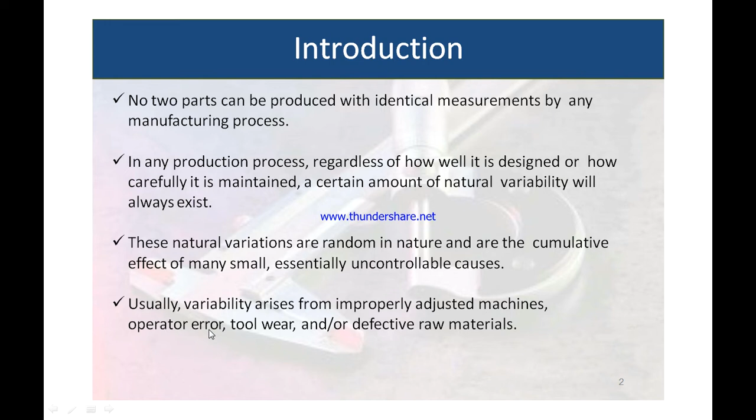Due to this variability, we have to go for tolerances. Such variability is generally large when compared to natural variability. The chances of natural variability are less than the variability due to parameters like machine problems, operator problems, tool wear, or raw material.

Characteristic variation can be attributed to assignable causes that can easily be identified and controlled. If the process can be kept under control - that is, all the assignable and controllable causes of variation have been eliminated or controlled - then the size variation will be within the prescribed limit.

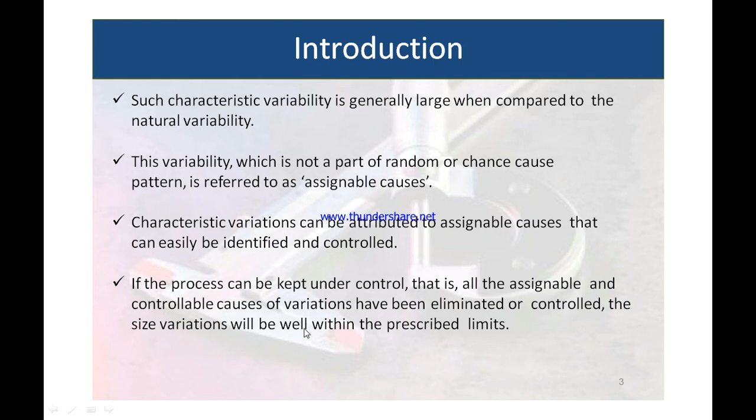So to maintain the size, we must control all the chance causes and assignable causes of variation. Some variability in dimension within a certain limit must be tolerated during manufacture, however precise the process may be.

So some variability must already be tolerated during manufacture. The permissible level of tolerance depends upon the functional requirements, which cannot be compromised.

Suppose we have to manufacture any product for some specific function. The permissible level of tolerance depends upon this specific function's requirement. So that function requires a specific tolerance which cannot be avoided.

No component can be manufactured precisely to a given dimension. It can be made to lie between two limits - upper limit and lower limit, that is maximum and minimum limit. The designer has to suggest the tolerance limits which are acceptable for each dimension used

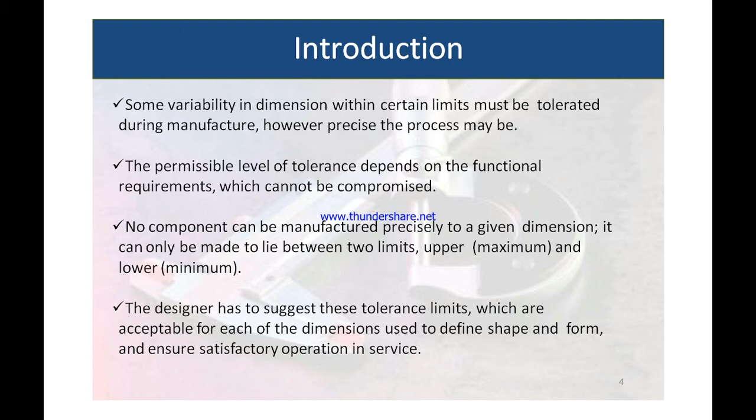to define the shape and form and ensure satisfactory operation in service. So we must give some freedom to the designer to design a component which must be assembled. For this assembly purpose, we must allow tolerance to the parts.

When the tolerance allowed is sufficiently greater than the process variation, then no difficulty arises. The difference between the upper limit and lower limit is termed as

permissive tolerance. For example, suppose we have to manufacture a shaft having diameter of 40 plus or minus 0.02 mm. This is generally a bilateral tolerance.

This means that the shaft which has basic size 40 is accepted, 40.01 and 40.02 is also accepted, and the size of 39.99 and 39.98 is also accepted, because this diameter lies between the two limits of sizes, that is upper limit and lower limit. So permissive tolerance equals 40.02 minus 39.98, which is 0.04 mm, the permissible variation.

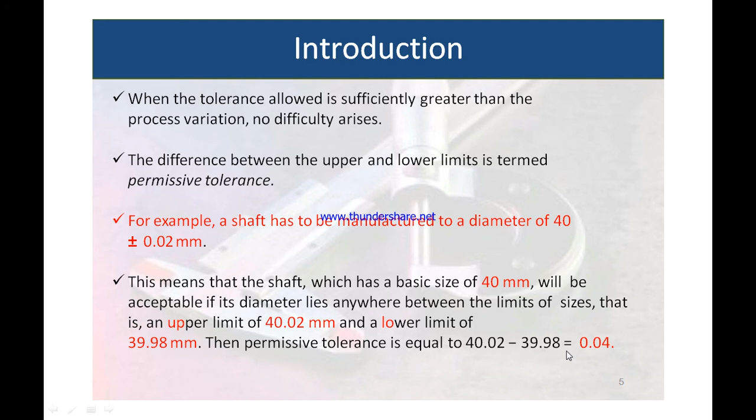So what is the tolerance? The tolerance can be defined as the magnitude of permissible variation of a dimension or other measured value from the specified value. It can also be defined as the total variation permitted in the size of a dimension, and it

is the algebraic difference between the upper and lower acceptable dimension. It is an absolute value. So permissible variation in the size is called tolerance.

The basic purpose of providing tolerance is to permit dimensional variations in the manufacturing of the component, adhering to the performance criteria as established by the specification and design.

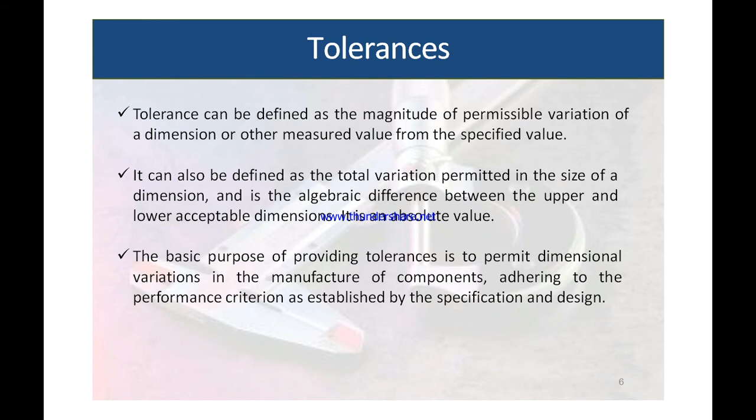Generally, this tolerance is given for the manufactured component to accept variation. So if high performance is the sole criteria, then functional requirements dictate the specification of the tolerance

limits. Otherwise, the choice of setting tolerance to a limited extent may be influenced and determined by factors such as methods of tooling and available manufacturing equipment. The industry follows certain approved accuracy standards such as ANSI and ASME.

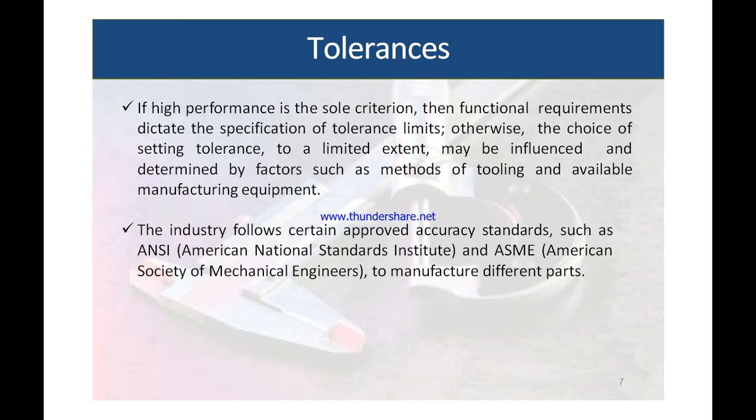So importance of tolerance - why is tolerance given? Tolerance can reduce the cost. How? By reducing the scrap and rework, it can reduce the cost. Once we give tolerance to any part, there is less chance of rejection, because the operator gets permissible variations to manufacture the part between two limits. So there is less chance of rejection due to the tolerance. Hence it can reduce the cost.

It improves the accuracy. When we give tolerance to any part, we have to manufacture as per the assembly point of view. So when we manufacture a part with respect to tolerance, there is a chance the parts assemble together very well in case of assembly. So it improves the accuracy also.

It implements discipline and quality consciousness in workers' minds - another important point in case of tolerance. When we give tolerance to the part, the operator always keeps in mind that he must produce the part within the limits. So he must be disciplined throughout the manufacturing process to meet the required tolerance. This improves discipline in the worker. It also improves quality consciousness, since whenever we give close tolerance, the worker knows the importance of this particular quality, so quality consciousness in the worker's mind improves.

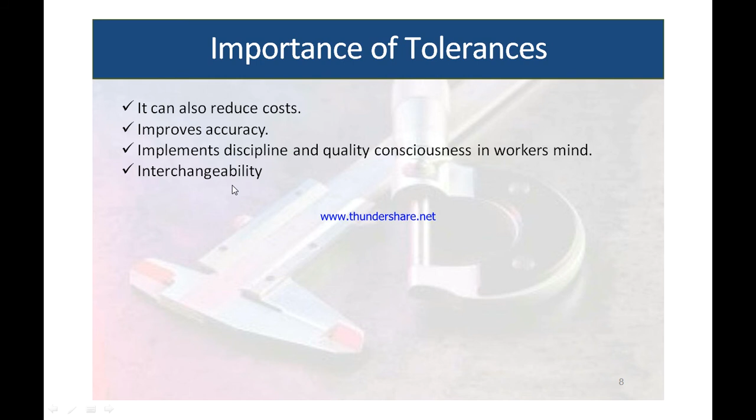Next is the relation between manufacturing cost and work tolerance. It is very important to relate the production of components within the specified tolerance zone to its associated manufacturing cost. Manufacturing cost is inversely proportional to the work tolerance. As permissible tolerance goes on decreasing, the manufacturing cost incurred to achieve it goes on increasing.

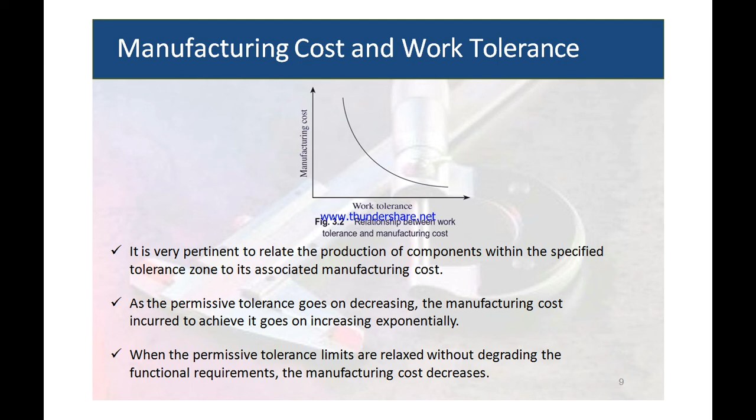Look at this tolerance zone: suppose this is 0, 0.1, 0.2, 0.3, 0.4, 0.5. The tolerance goes on increasing on this side and manufacturing cost on this side. For 0.1 mm tolerance, you bear the highest cost. At this 0.2 mm variation tolerance zone, we have a lower cost. For 0.5 mm, we have the lowest cost. When the permissible tolerance limits are relaxed without degrading the functional requirement, the manufacturing cost decreases.

Next point is types of tolerances. There are different types of tolerances which can generally be classified into the following categories: number one unilateral tolerance, number two bilateral tolerance, number three compound tolerance, and number four geometric tolerance. We can see one by one.

Number one, unilateral tolerance - it is the tolerance where the tolerance distribution is only on one side of the basic size. In other words, the tolerable limits totally lie on one side of the basic size, either above or below it. What we call a unilateral tolerance. Suppose this is 40 plus 0.02 and plus 0.01 - all the tolerances are on the same side. So this is the unilateral tolerance.

40 minus 0.0 and plus 0.02 - here the upper limit is 40.02 and the lower limit equals the basic size. Though this sign is minus, the basic size will not change; it changes only on one side. So this is a unilateral tolerance.

40 minus 0.01 and minus 0.02 - the tolerance totally lies on the negative side, so it is only on one side - this is unilateral tolerance. This is 40 plus 0.00 and minus 0.02 - here the tolerance lies only on the negative side; though it shows positive, it is 0, so tolerance is only on one side. So this is a unilateral tolerance.

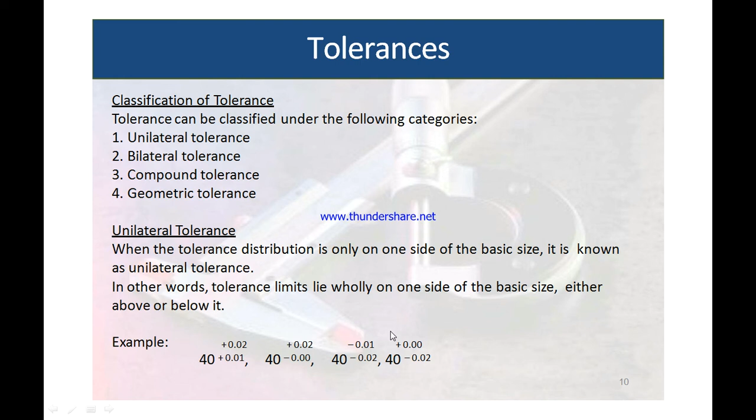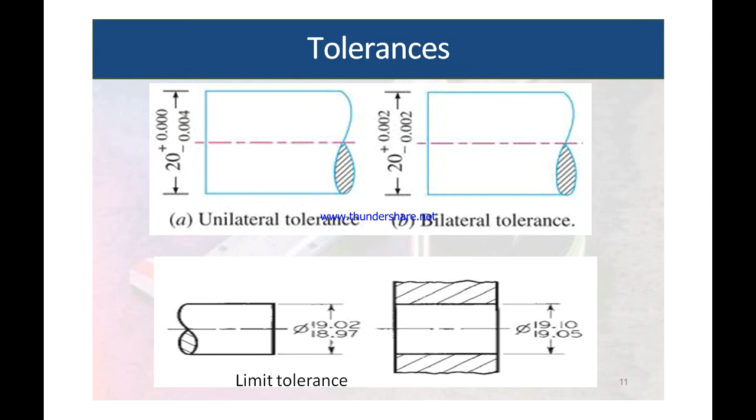Next is bilateral tolerance. When the tolerance distribution lies on either side of the basic size, it is known as bilateral tolerance. In other words, the dimension of the part is allowed to vary on both sides. Example: 40 plus or minus 0.02. So upper limit is 40.02 and lower limit is 39.98. Variation is on both sides, so this is bilateral tolerance.

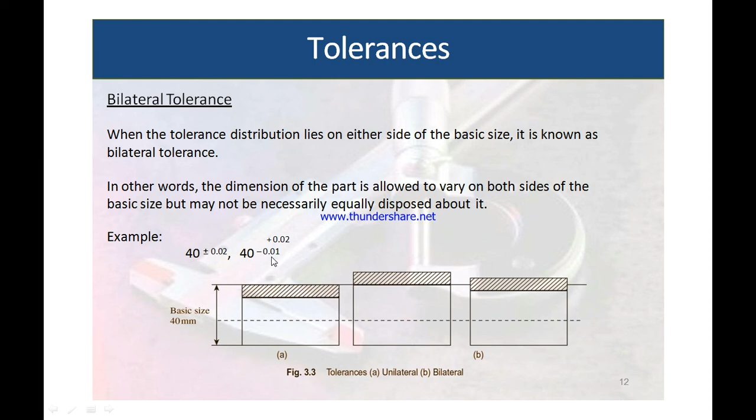In this case, 40 plus 0.02 minus 0.01, the variation is on both sides, upper limit and lower limit both are variable. So tolerance is given on both sides. This is also a bilateral tolerance.

In practice, compound tolerance should be avoided as far as possible.

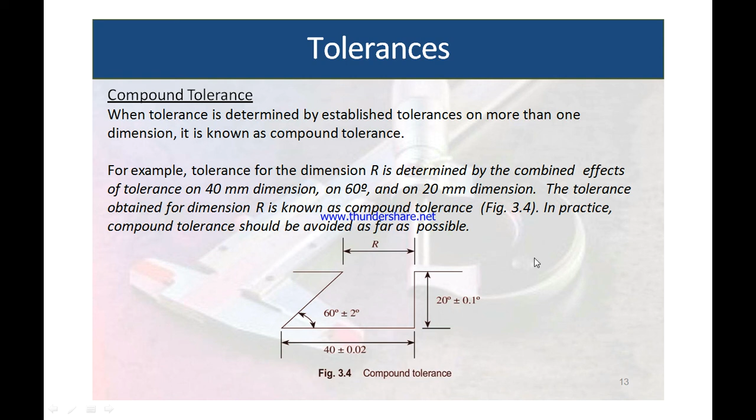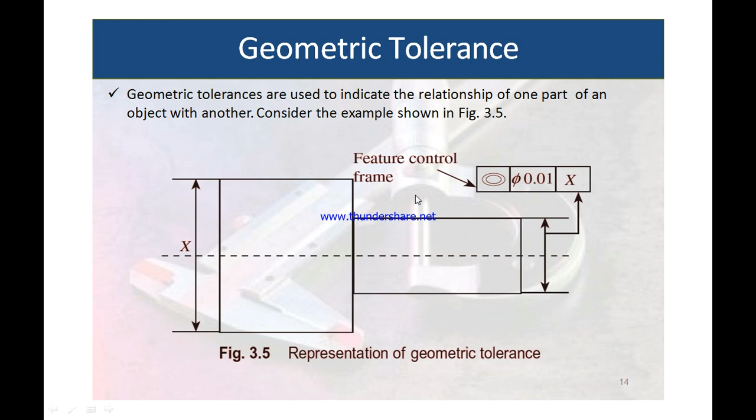Next is geometric tolerance. Geometric tolerances are used to indicate the relationship of one part of an object with the other. Consider the example shown in the figure. Here we have to maintain the feature control frame, that is concentricity of this particular face with respect to the x face, within the range of 0.01 mm. This type of tolerance is called geometric tolerance. Only geometric tolerances are given on the production drawing.

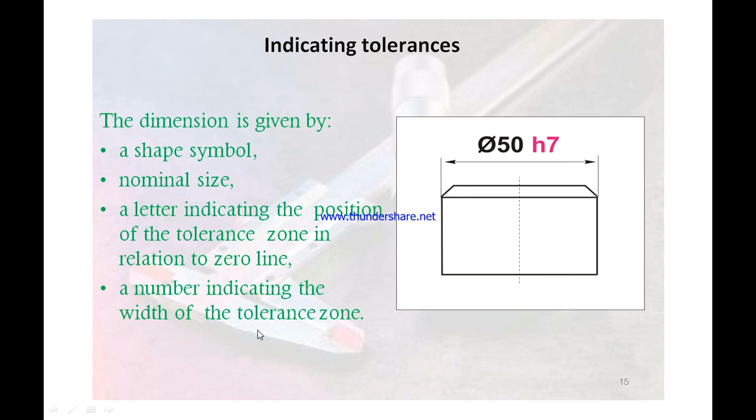Then how to indicate the tolerance? Look at this: the dimension is given by a shape symbol phi, a nominal size 50, and a letter indicating the position of the tolerance zone in relation to the zero line, that is h7. h stands for basic shaft size, and the number indicates the width of the tolerance zone.

There are other tolerances used in the manufacturing field. There's form tolerance. Form tolerances are the group of geometric tolerances applied to individual features. This form tolerance is applied to individual features. They limit the amount of error in the shape of a feature and are independent tolerances. Form tolerance as such does not require a locating dimension. These include straightness, circularity, flatness, and cylindricity.

Next is orientation tolerance. Orientation tolerances are a type of geometric tolerance used to limit the direction or orientation of a feature in relation to other features. These are related tolerances. Perpendicularity, parallelism, and angularity fall into this category.

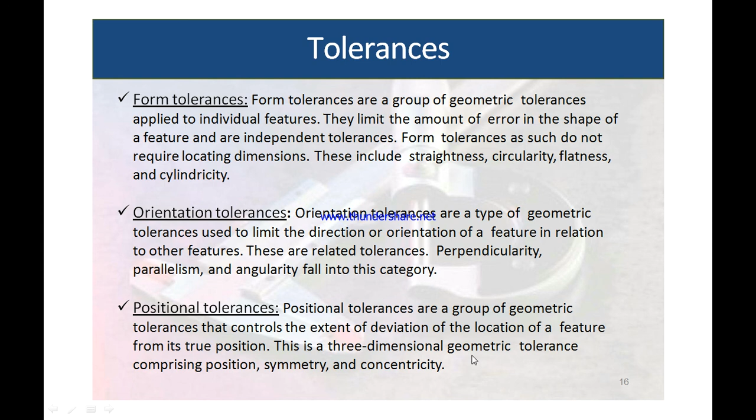Next is positional tolerance. Positional tolerances are the group of geometric tolerances that control the extent of deviation of the location of a feature from its true position. This is a three-dimensional geometric tolerance comprising position, symmetry, and concentricity.

Suppose we take one example. Consider the example shown in figure 3.6, accumulation of tolerances. How can it be done? There are three parts. Suppose this is the shaft to be manufactured, a stepped shaft with steps A, B, and C, having lengths LA, LB, and LC with a total length L.

The LA part has a tolerance of 30 plus 0.02 minus 0.01, same as LB having the tolerance and LC having the tolerance. So the three stepped parts have three different tolerances. All tolerances are bilateral tolerances because they are on both sides of the basic size, plus or minus.

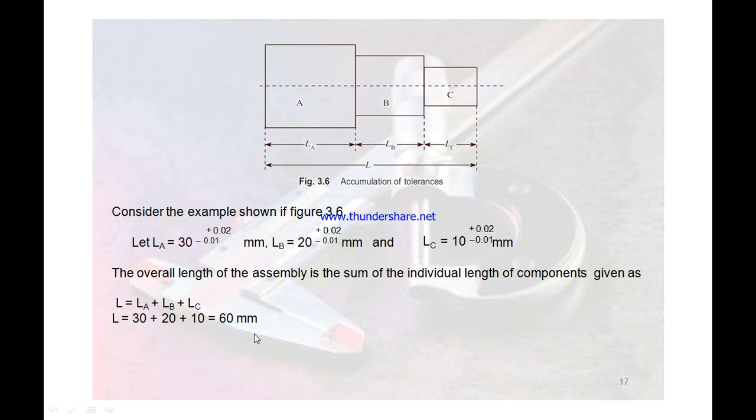The overall length of the assembly is the sum of individual length components. So overall length is LA plus LB plus LC, that is 60 mm as mentioned. The cumulative upper tolerance limit is the addition of all tolerances, 0.02, 0.02 and 0.02, which comes to 0.06 mm. The lower limit is the addition of minus 0.01, minus 0.01 and minus 0.01, so the cumulative lower limit is 0.03 minus. Therefore the dimension of the assembled length will be total dimension 60, with lower limit 0.03 and upper limit 0.06 mm.

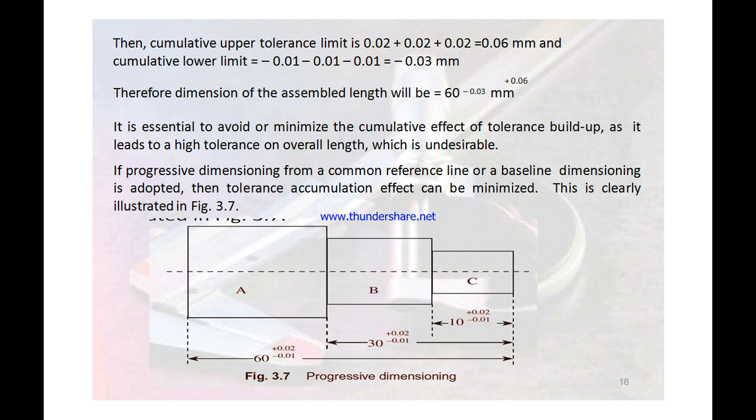It is essential to avoid or minimize the cumulative effect of tolerance buildup, as it leads to a high tolerance on overall length, which is undesirable. If progressive dimensioning from a common reference or baseline dimensioning is adopted, then the tolerance accumulation effect can be minimized. This is clearly illustrated in this figure, showing how you can minimize the accumulation effect. So this is all about tolerancing.